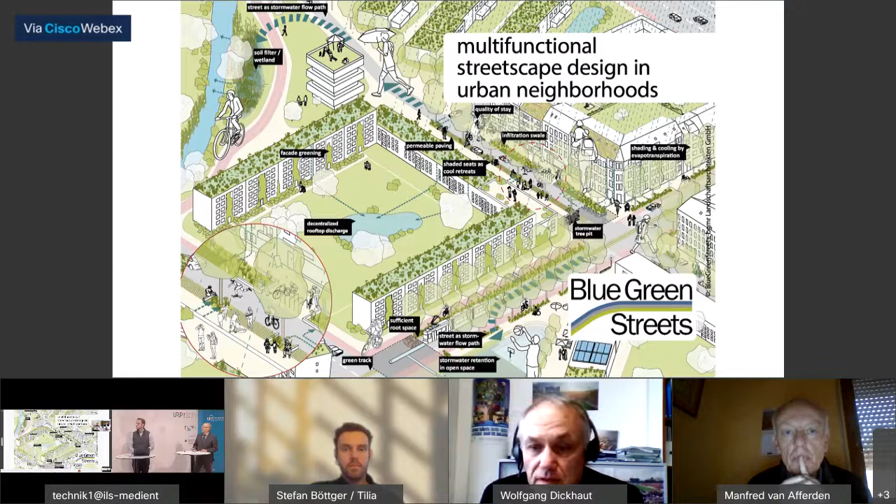Thanks, Max, and welcome also from my side. As already mentioned, I will talk about a project funded by the BMBF, Multifunctional Streetscape Design in Urban Neighborhoods, or our short title, Blue-Green Streets.

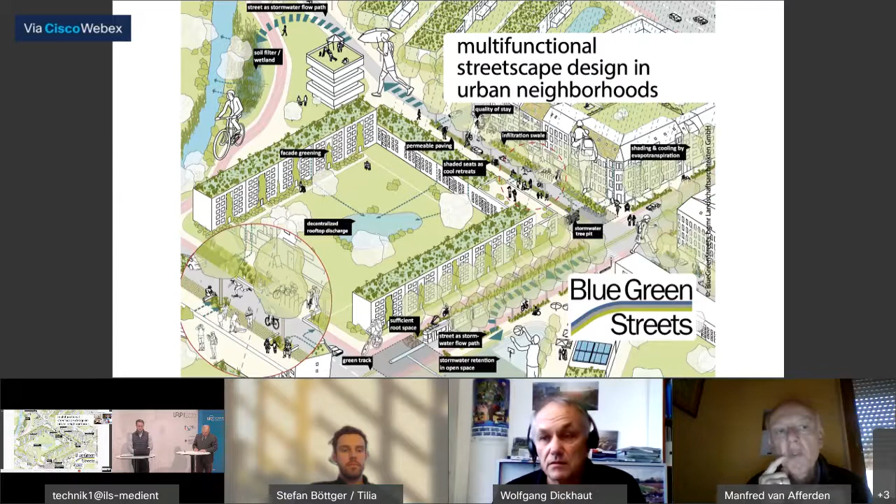What you can see here is the dream of a future city with a lot of blue-green infrastructure, and our project, Blue-Green Streets, is focusing directly on the streetscape—how to integrate all these elements you can see in this picture, even in such a very busy surface. It's a project with a lot of partners. I will not introduce all of them now because of time, but there are university partners as well as companies, and we are working with a lot of partners around Germany.

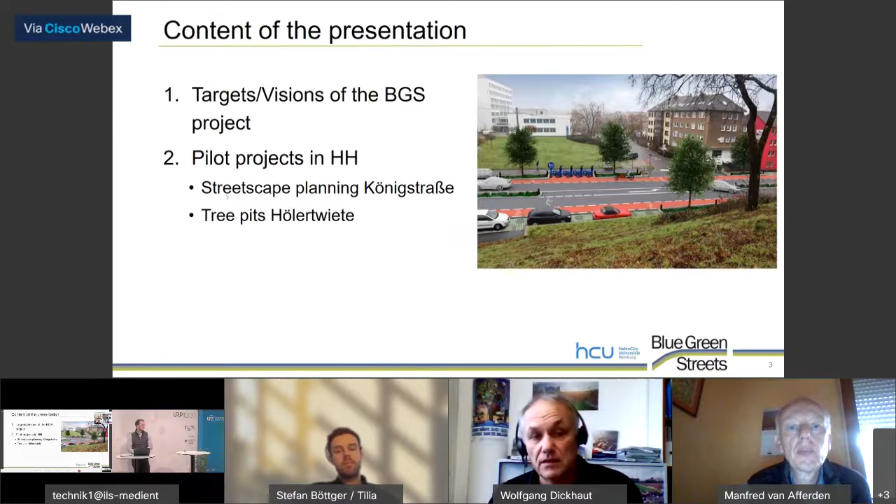I will talk about the vision of the Blue-Green Streets project, but I will focus mainly on two pilot projects which we are running in Hamburg's streetscape planning: Königstraße and the tree pits in Hölertwiete. Let's start with the vision.

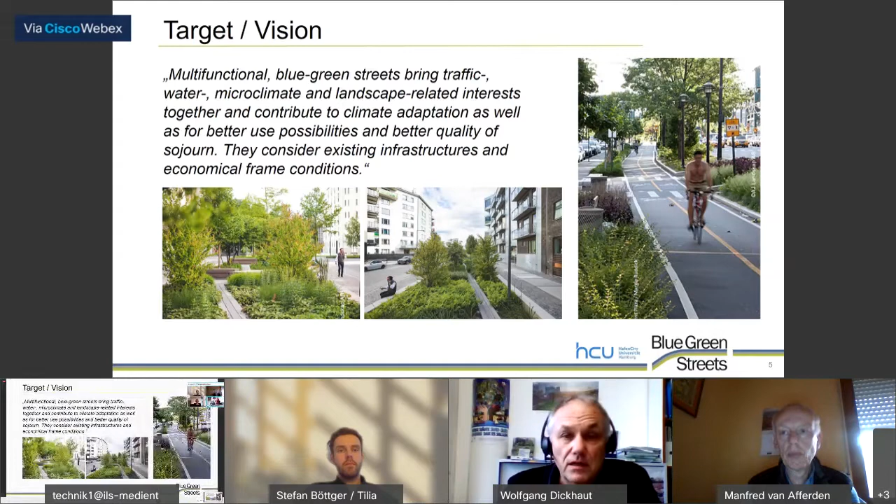In the beginning of our project, we formulated: multifunctional blue-green streets bring traffic, water, microclimate, and landscape-related interests together and contribute to climate adaptation, as well as better use possibilities and a better quality of sojourn. They consider existing infrastructures and economical frame conditions. So we wanted to stay close to the existing situation of streets and try to achieve a kind of multifunctional usage of the streetscape.

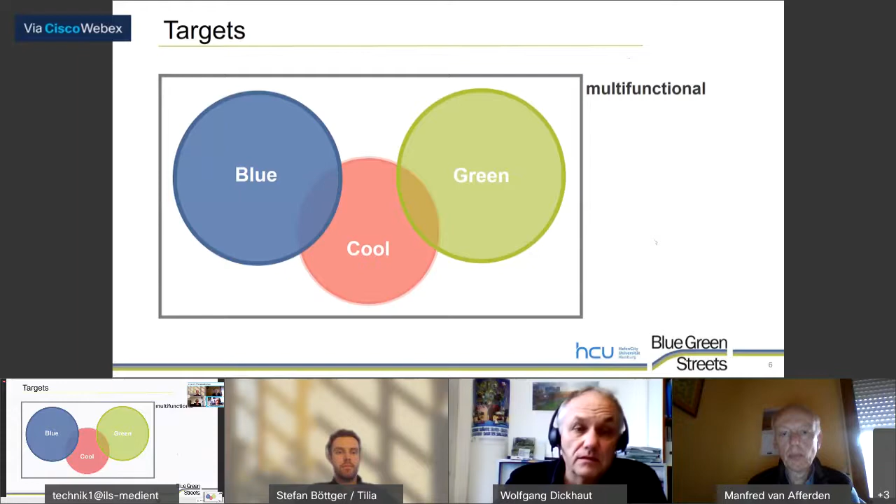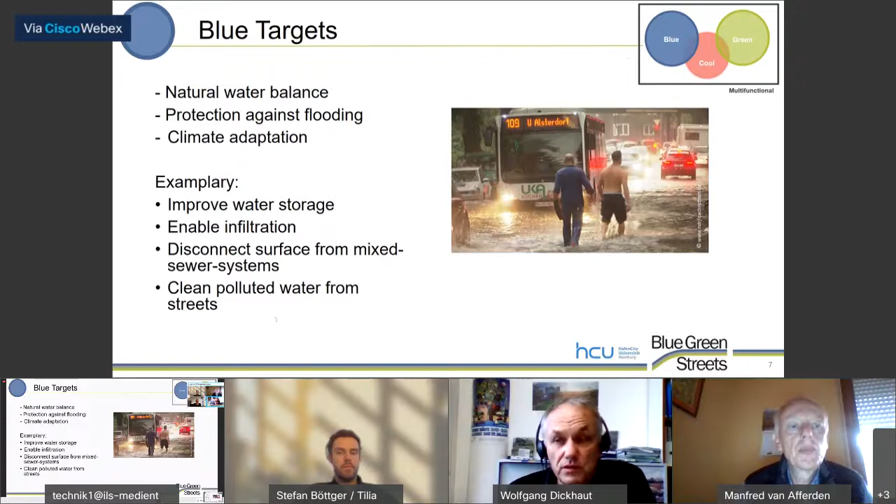The topics blue, green, and cool are our guiding targets. Some examples: when we are talking about blue, it's about improving water storage, enabling infiltration, but also thinking about the pollution of street water and trying to find the right ways of treatment.

When we are talking about green targets, I think in the middle is the quality of sojourn—making it more useful for the people. For this target we try to improve the quantity and also the quality of landscape, and try to improve the vitality of green spaces.

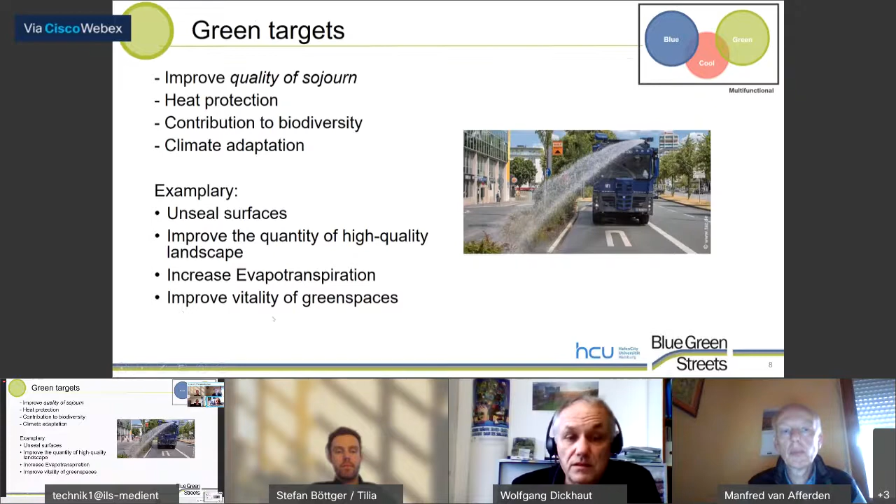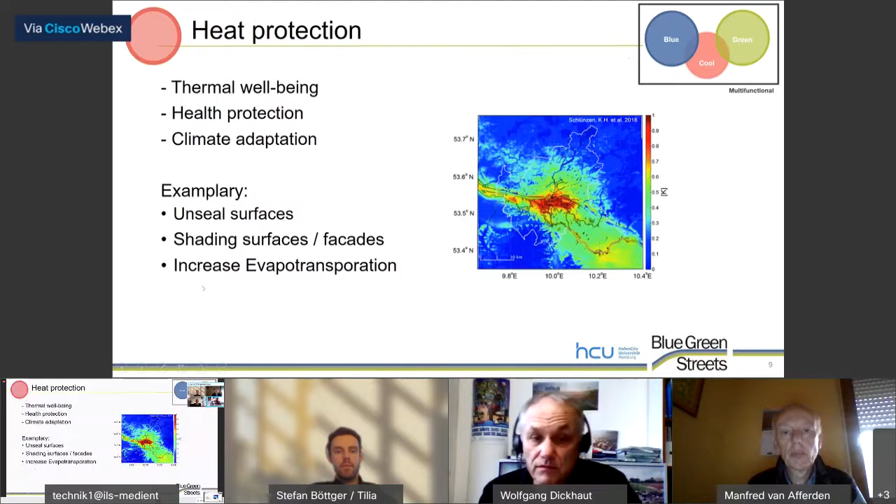When we are talking about heat protection or cooling, we are talking about shading surfaces or increasing evapotranspiration. As I already mentioned, we are not focusing only on Hamburg.

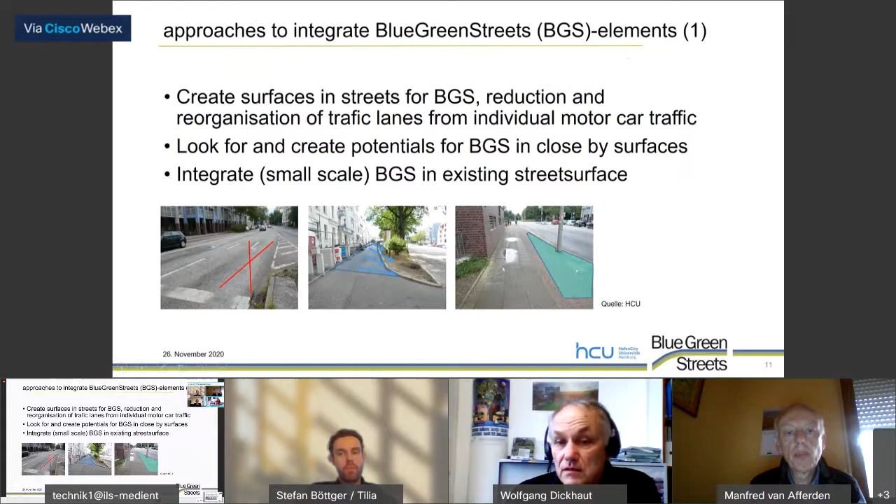And the smallest aspect would be to integrate BGS in existing street surfaces, as you can see here in the right-hand picture. What we try to integrate is a new cascade of BGS elements.

Formerly, we had the situation that most of the water was discharged directly into sewer systems or natural water bodies. After the new idea of water-sensitive urban design, a lot of projects are focusing on infiltration of water.

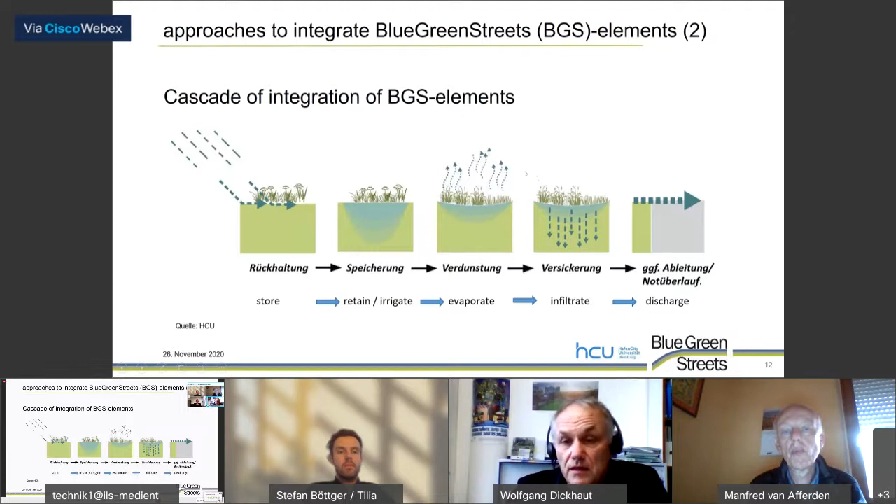But we think with the integration of blue, green, and cool that we have to use the water much more efficiently for the purpose of retaining, irrigating plants, and evaporating the water back to the air, to make it possible to use the water in a better way for cooling the cities. So, to change the priorities of these elements of the water cycle.

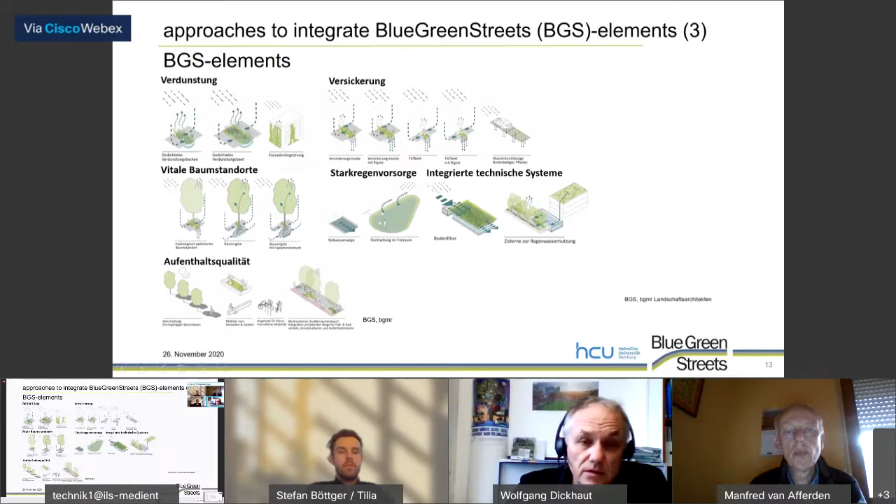We developed and designed a lot of different elements. I will not introduce all of them here. You can have a look at our website, where we present this in more detail.

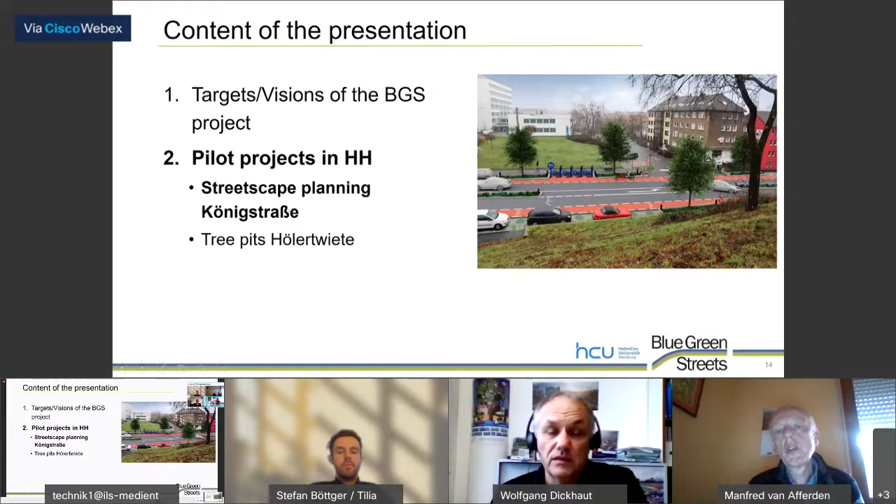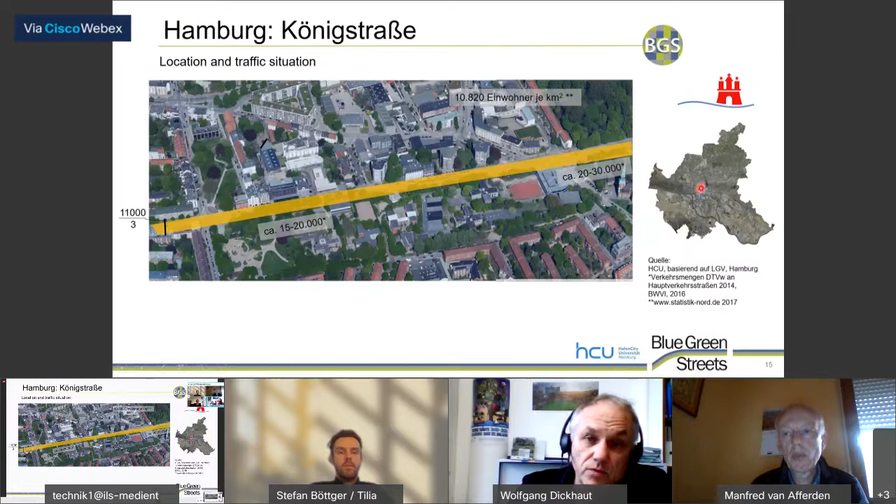About the pilot projects in Hamburg, I will start with one project where I will explain the way of changing the streetscape. We are focusing on a street in the middle of Hamburg, with a lot of traffic on it, 20 to 30,000 vehicles per day, in a dense urban context.

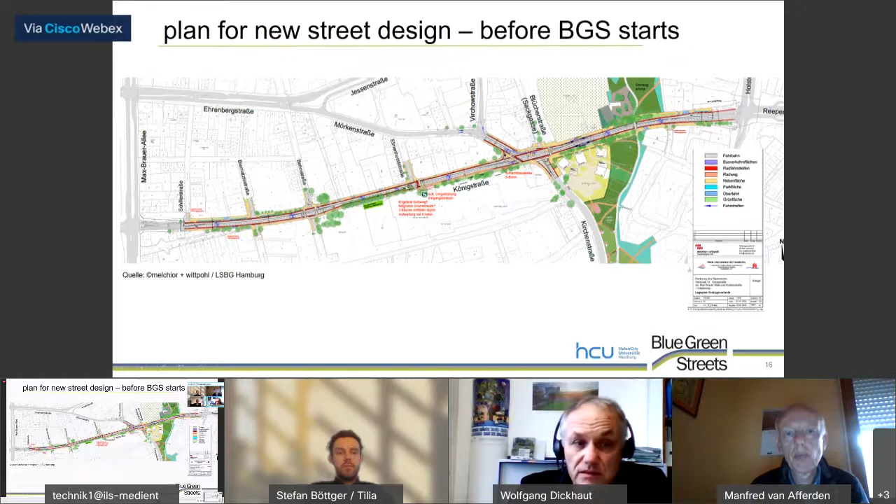We started one and a half years ago with this first map, this first idea of a plan for the reorganization of the street, which was designed by the authorities together with the company at the very beginning of the planning process.

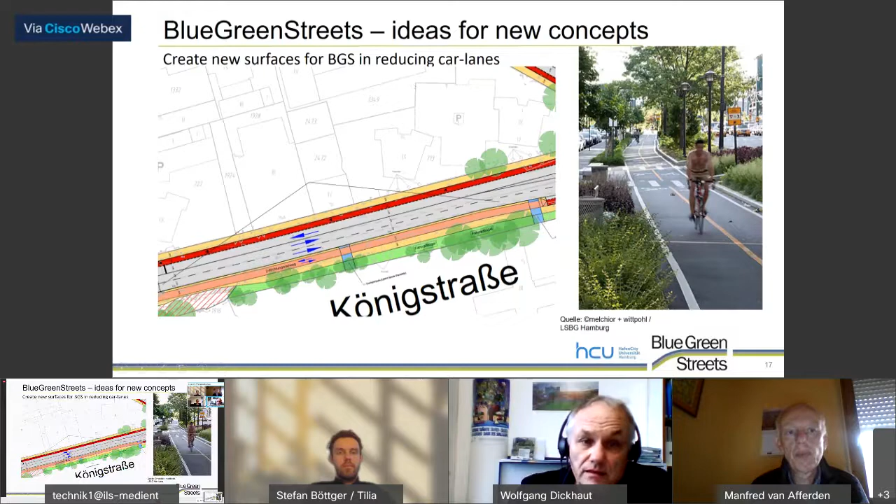And then we started thinking about integration of blue-green infrastructure. The first idea was to try to reduce car lanes, and we did a calculation. We came to the decision that it will be possible from the traffic point of view to reduce lanes, and we designed a huge new lane of blue-green infrastructure, which we are now planning in much more detail.

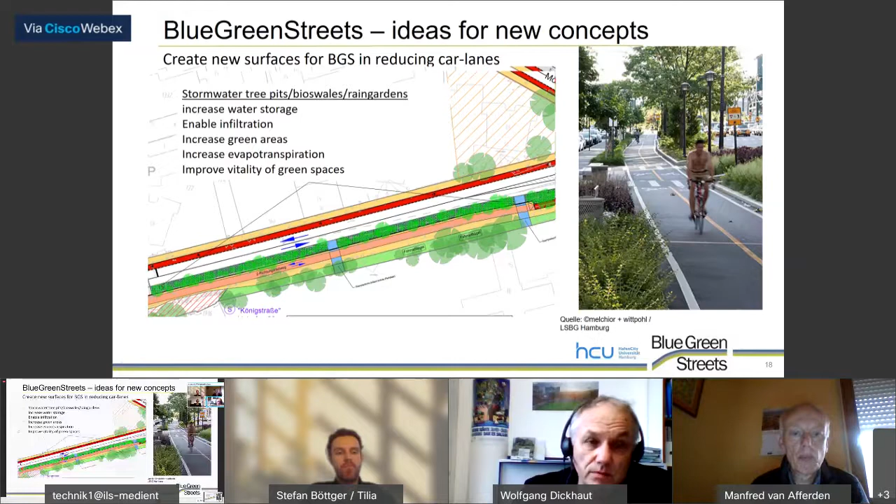We are just in the process, together with the responsible authorities, of doing this. You can see here a picture and animation.

Another aspect is to analyze nearby surfaces. In this case, we are also looking at streets which enter the main street. This is the Königstraße, and this is a neighborhood street.

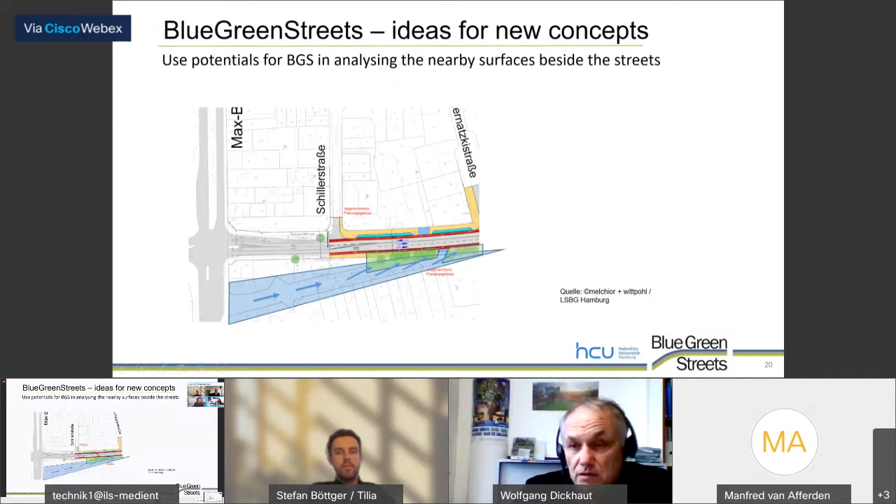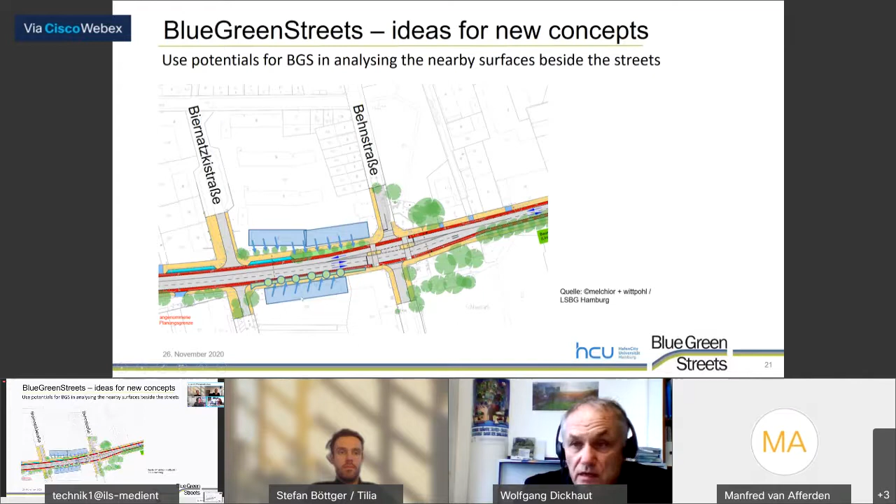We designed a new pocket park in this area and tried to use, in the future, the water to irrigate this new pocket park, or to use the water from rooftops to irrigate plants on the streets, because there we will have much cleaner water.

Some more pictures to illustrate this, especially when we try to use very small-scale BGS elements, which bring the possibility to infiltrate the water.

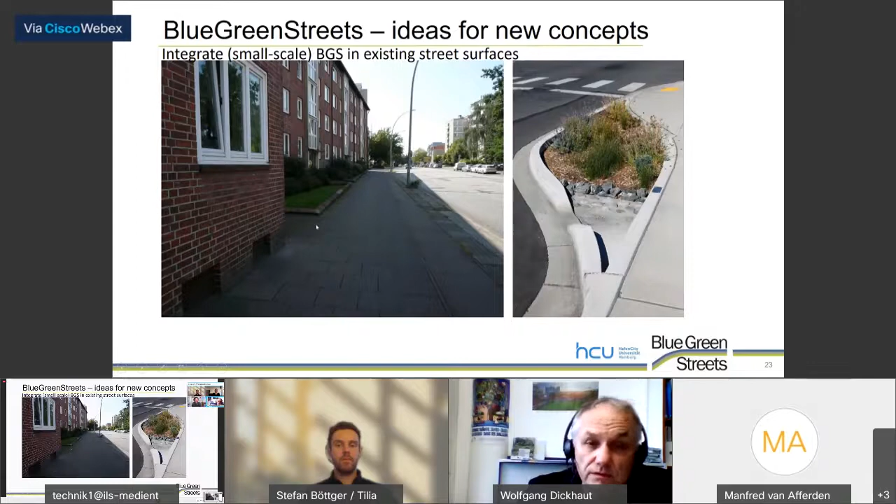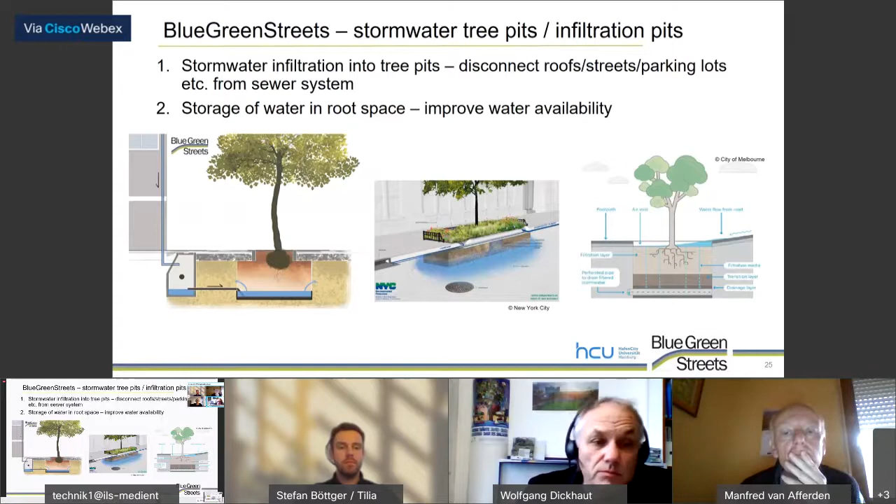A last aspect: we are working with the topic of stormwater infiltration into tree pits. There are a lot of projects around the world on this, and we designed a new tree pit with the integration of water from rooftops and a new storage reservoir at the bottom of the tree pit, where we try to store water for a while so the roots can reach this reservoir and come better through the times of drought, which are much more frequent in Hamburg in recent years.

So we designed this and built it in the street of Hölertwiete in Harburg. You can see here some pictures from the construction area, up to half a year ago. It's now finished, and we started doing the monitoring, because we work together with soil experts.

And plant experts, to see whether the water management decision affects the trees, and whether the trees suffer from this new water, or whether they can use the water for better irrigation and for a better and more vital development.

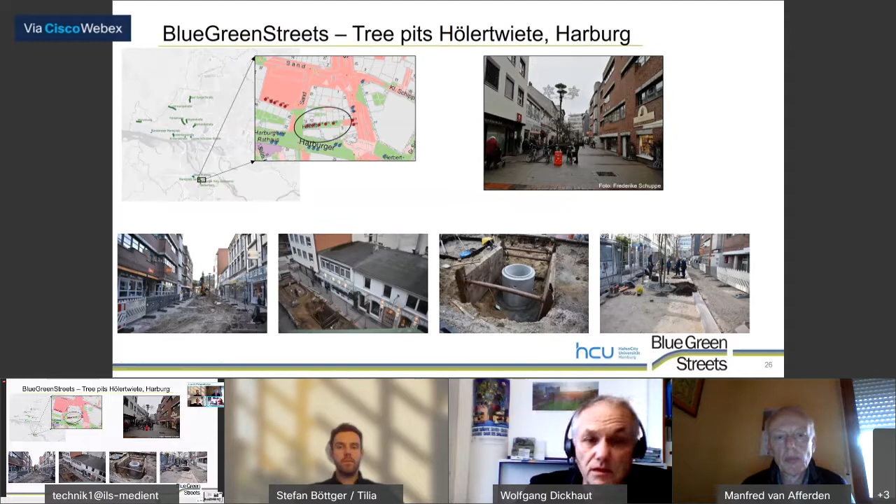So these are the main aspects which I wanted to present in this short presentation. Thanks a lot for your attention, and if you are interested, we can have a short discussion about this now.

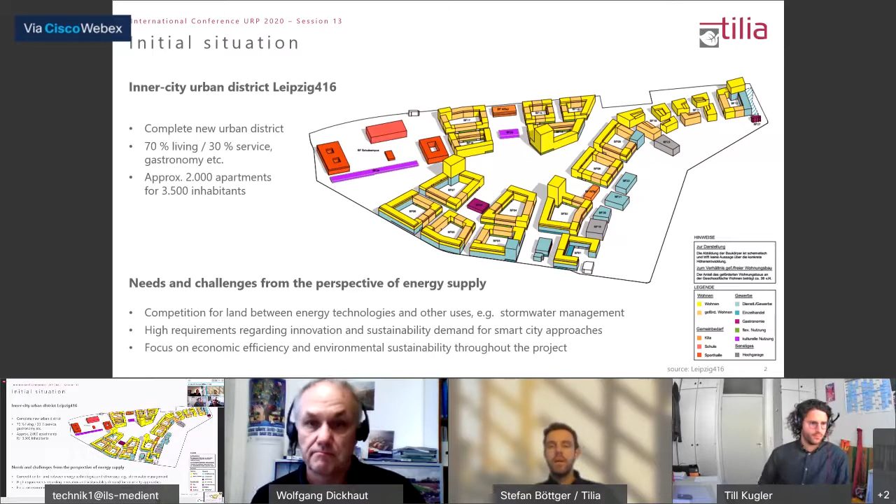And as it is a new quarter, built more close or really close to the center, we have a lot of challenges and needs from the perspective of the energy supply. For example, we have a competition for land between energy technologies and other technologies such as stormwater management. Due to that, we have high requirements regarding innovation and sustainability, a sustainability demand for smart city approaches.

And besides environmental sustainability, we also have a focus on economic efficiency, as the area is developed by a private investor.

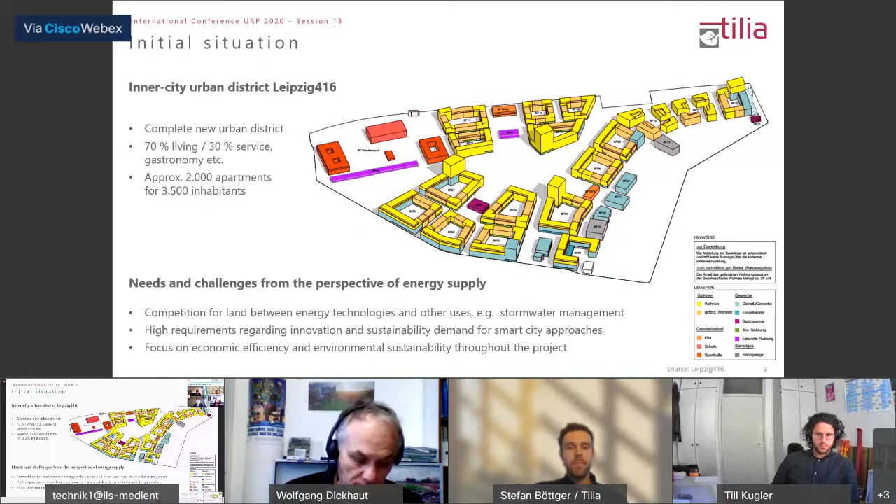In our approach, we develop certain scenarios for the energy supply and energy management. You can see our baseline scenario 0. We have a heating demand for the whole district of around 19,000 megawatt hours. We have a cooling demand of 5,800 megawatt hours per year. And for household applications, we have an electricity demand of around 13,300 megawatt hours.

Connected to that, we determined the CO2 emissions, as it is a main focus to develop a CO2-friendly inner city quarter. For our baseline, we decided to supply the heat energy via district heating supplied by the local energy company, the Stadtwerke Leipzig. Using that, we have a CO2 emission of around 2,100 tons per year, which is already quite a good value if you compare it to a system which would use gas condensing technology with around 4,800 tons per year. So this is just as a comparison.

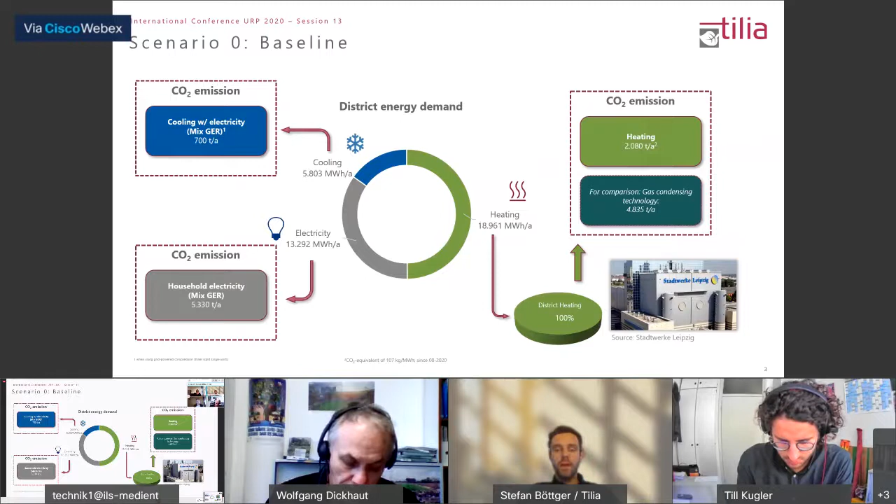So already with this baseline scenario, from the perspective of the heat supply, we already have good CO2 emissions.

For the development of further scenarios, we choose the pathway of CO2 emissions. That means in our next scenarios and the next step, we try to reduce these CO2 emissions, starting with our baseline scenario, which I described before.

Green represents the CO2 emissions for the heat supply, and blue for the cooling system. We already developed the next scenario, which we call economic optimum, using existing state-of-the-art technologies, but also quite new and not so common technologies such as wastewater heat recovery. Due to that, we can achieve a reduction in CO2 emissions compared to the baseline scenario of already 20%.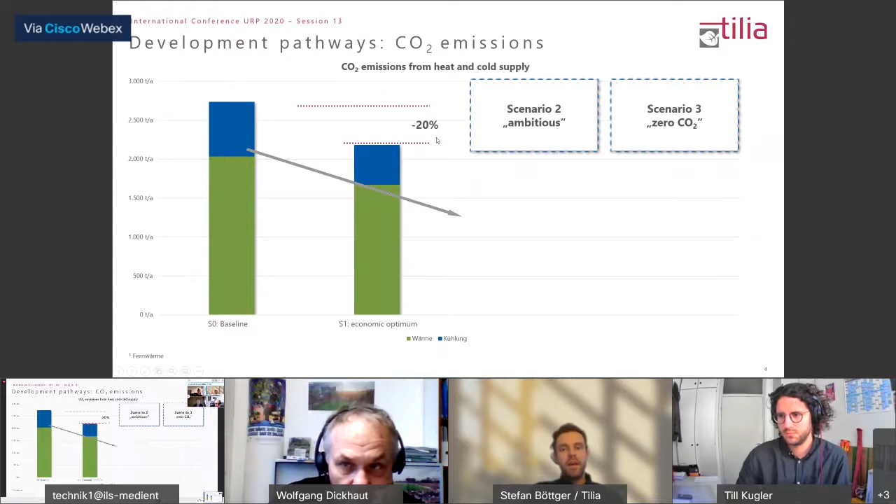For our next scenarios, we try to reduce the CO2 emissions further. The next scenario we call ambitious, in terms of CO2 reduction. And our final scenario will be a zero CO2 scenario, if we can achieve that, we will see. To achieve that, we try to maximize the use of renewable energy sources for the whole district, in terms of heat generation, heat storage, electricity generation, cooling generation and storage, and also including the application of blue-green technologies.

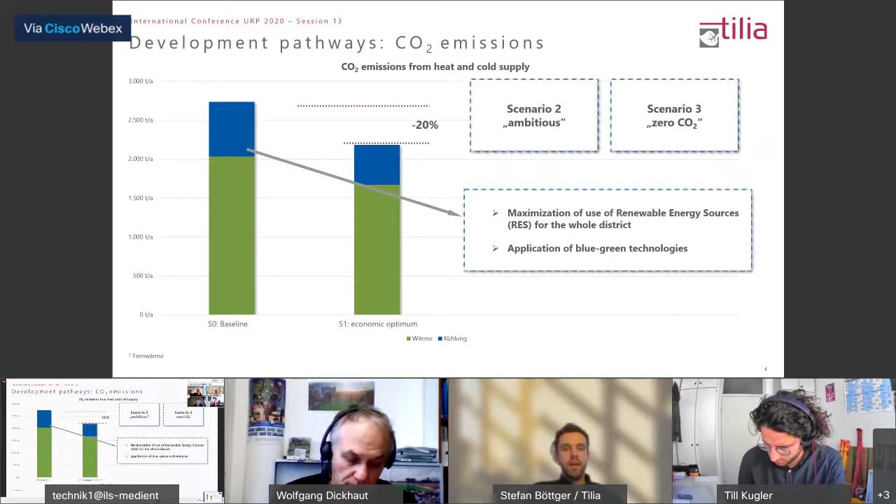One technology out of this portfolio is a pilot plant or pilot approach, which we developed together with the UFZ in the framework of our research project. We call it flow heater in combination with the retention green roof. The idea, which we can apply for buildings or for a whole district, is that we want to provide additional cooling on hot summer days, or normal summer days, by using groundwater used for irrigation in combination with concrete activation, so cooling over the walls and over the ceiling, and to transfer this extracted heat on the roof in the stormwater retention space.

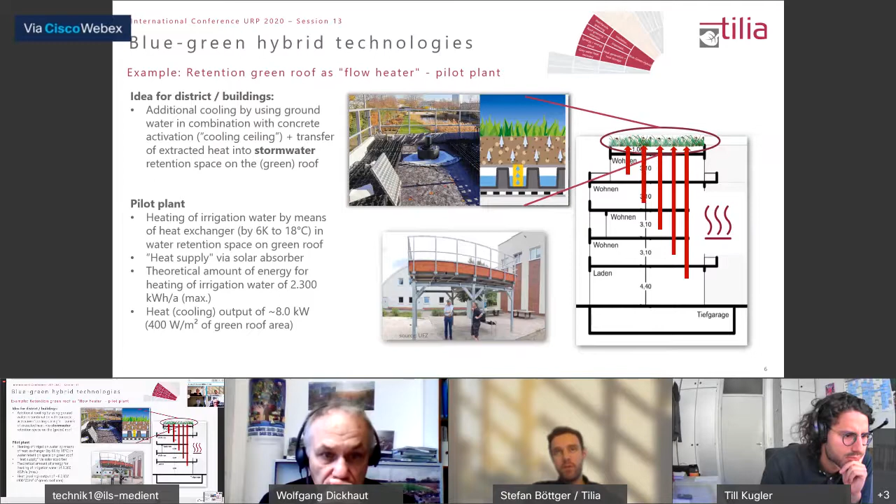Furthermore, we're using simulation software called Top Energy, where we describe, show, and implement our scenarios. All the scenarios we're developing there, we have a very detailed overview of production and demand of heating and cooling. We can see in detail the heat requirements in living areas, for example, and also the specific global radiation when it comes to electricity production from PV systems.

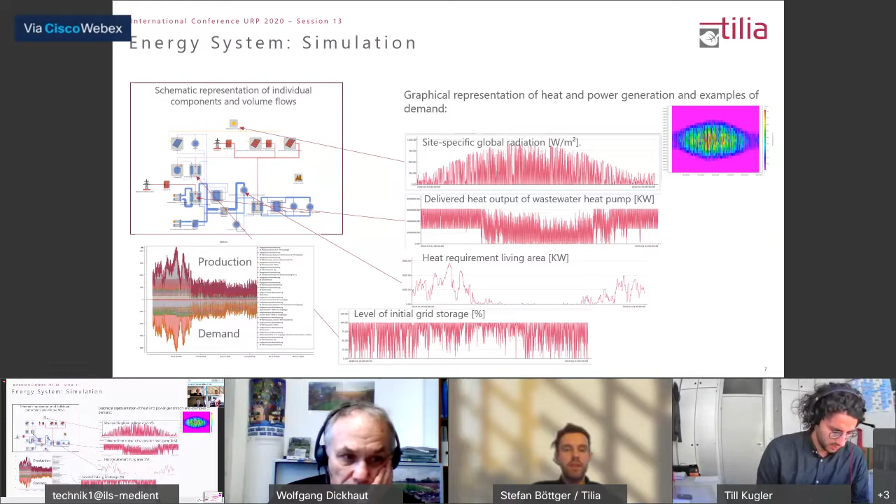We don't use this simulation software just for fun and to make nice pictures in the end. The idea of the usage is that we simplify the operational management of the whole district, not just in terms of energy supply or energy management, but also for other approaches such as water management. So this is not just a focus for energy, but to bundle different approaches in terms of strategy. If I want to maximize my CO2 savings, or achieve the lowest energy prices in my district, I need some tools to achieve this, because the system is very complex. That's not just for the energy sector, also for stormwater management, as we already heard before. So we have different technologies, different scenarios, external effects, ambivalence, insecurity in the demand and in the production, and we want to use this tool to have a tool for the operation management in the end.

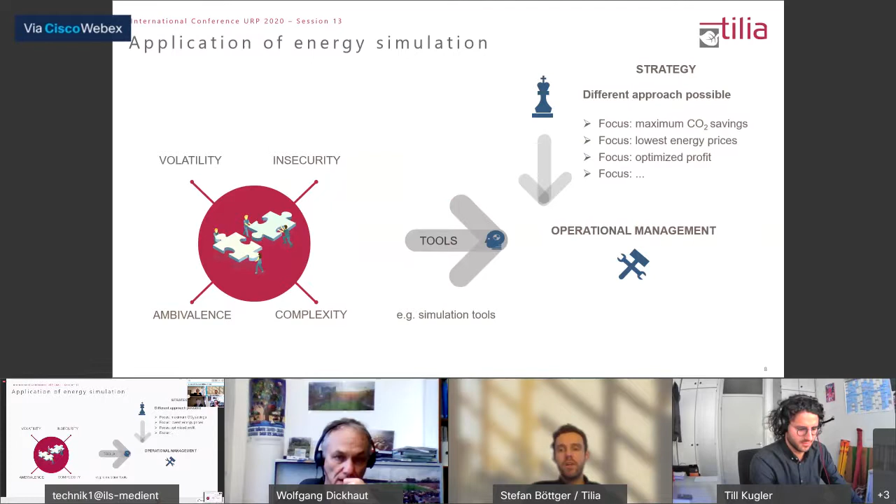So thanks for the attention, and if you have any questions, don't hesitate.